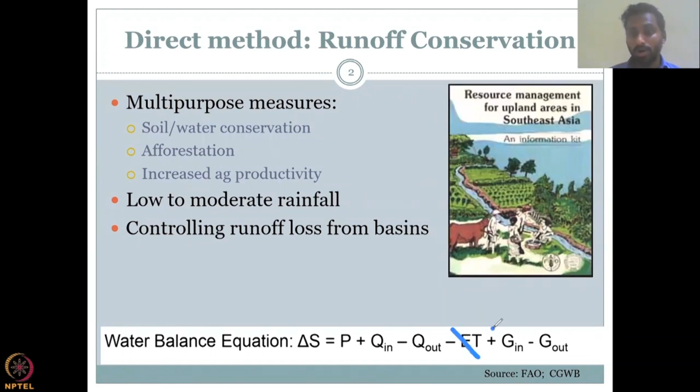And assuming, for example, in this area you don't have ET, so let ET be 0, groundwater in is equal to groundwater out, so let it be 0, and there is no water coming in. So groundwater in is 0. And surface water in, no pipe connection, nothing is coming in. This is the upland.

So what happens is your storage is nothing else but your precipitation minus the runoff, which means if you say there is 0 runoff, you close your basin, you control your basin preventing water from being lost, then your storage is basically your precipitation that you're catching and keeping within the basin. These are called zero or closed basins because they don't let the water out. And to be honest, in some regions, these are needed because the water is not enough for the upland people.

So moving on, we have these water balance equations and other equations that support that we need to capture the rainfall and also manage the rainfall very well. So these are runoff conservation. Basically, catch the rainfall before runoff, etc. If you catch rainfall directly, it is rainwater harvesting. If you let rainfall convert to runoff and then you conserve runoff, then it is runoff conservation.

So let's look at some methods. The first method is bench terracing. I'm using the methods given in the CGWB manual, and I'll be taking some references from TNAU, FAO, etc. So what you have here is bench terracing, or terracing, which is converting a sloping land into terraces. You cut through in between so that you slow down water.

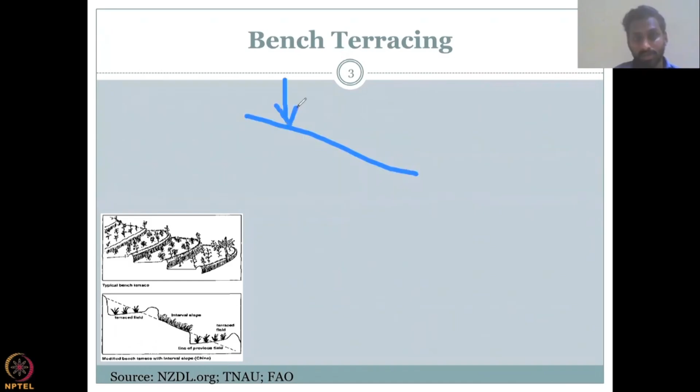So if I have it like this and rainfall is falling, water flows down along the slope. It is much faster rather than going in steps. For example, you have a slope and rainfall hits, then it quickly goes down the slope. However, if you make the surface terraced, cut through in between, then water would flow and then go down like this, go down like this, go down like this, right? I'll use a different color.

So this is your land surface. And then water will go like this, okay? So what is happening is you're delaying the water, and by delaying the water, because it goes down, goes down, goes down, then here there is good recharge happening. And net groundwater is recharged.

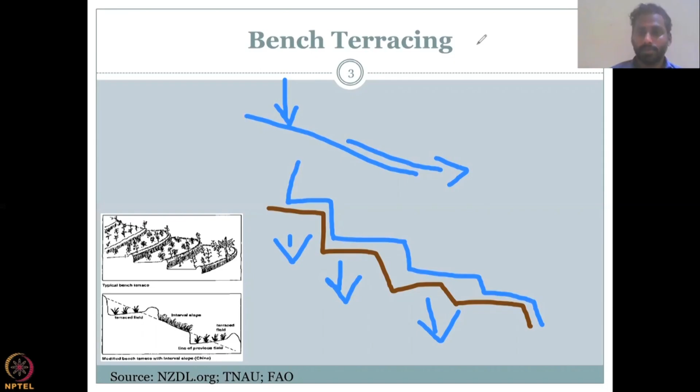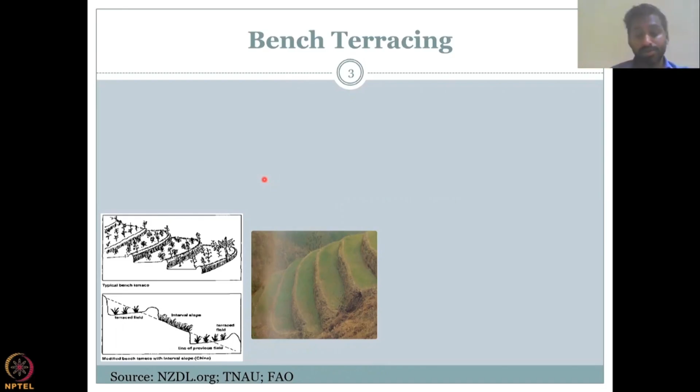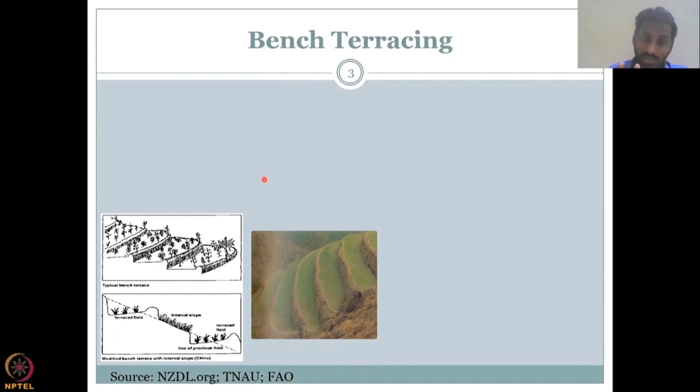Okay, so see a quick example. We have these locations mostly in the high upland regions or high elevation regions where there's good rainfall, but because of the slopy land, water just goes down. So it is kind of a runoff conservation where you wait till the rainfall converts to runoff and then you capture it, make it slowly go down and then recharge it.

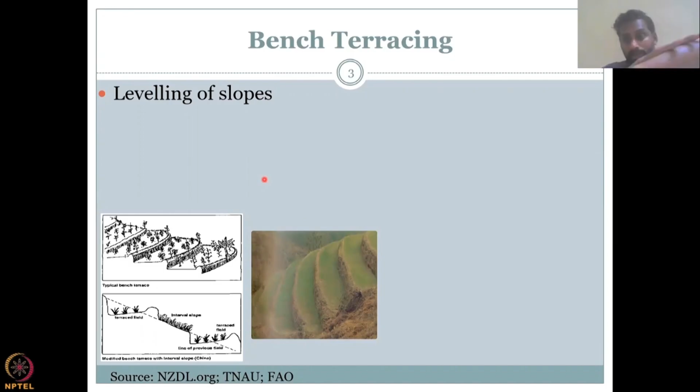So it starts with leveling of slopes. First, you make sure the slope is leveled, and then remove any unleveling patterns like a ditch or a gap, etc. So you make it leveled so that water can run smoothly, and adequate soil cover for irrigation is also needed. So you cut and then use some land where you can put the soil. So you need to get soil so that you can grow native species of vegetation or agriculture.

Remember, in the example I showed, when you cut it, you can further reduce the speed of the runoff if you have vegetation, because vegetation can act like a buffer, and that buffer would make the water go slow. Okay, so here's what is happening. If you have just plain land, then cut the land, water will move down a little bit slower. But if you have your agricultural slope along with terrace farming and or native species, water will slow down. Once it slows down, it goes into the recharge.

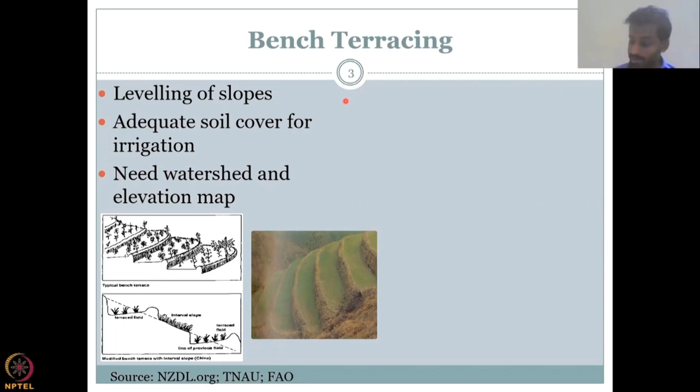You need the watershed area, the boundary of the watershed, and an elevation map. The watershed area gives you how much rainfall is going to come, and the elevation gradient gives you how many contours you can space. Okay, so because I know how the elevation changes, I can say every 10-meter elevation difference I can put one. If I don't know that, then what would happen is you will randomly put in these terraces and it won't work well.

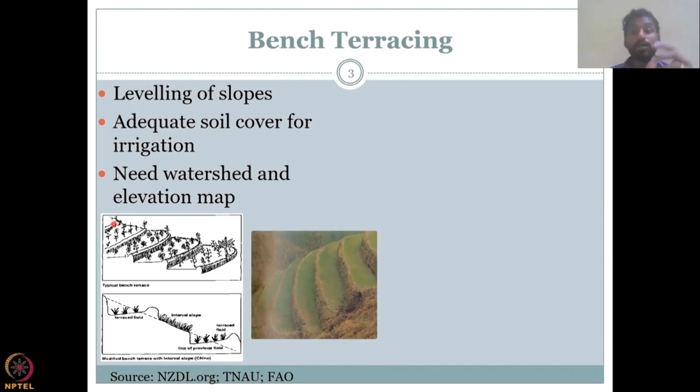So the idea is you convert a slope by cutting through terracing activities, and then put soil there, because initially there won't be any soil. Bring agricultural soil up and then put it there so that crops or new vegetation can grow. Once vegetation starts to grow, water will automatically slow down and then recharge, and also support the vegetation that is on the land. So FAO has given you multiple examples of these types, and which land uses you could use.

For example, all these are cross-sectional views. So you have the land like this, you cut the land, and then you can see from the cross-section what is the relevant construction. So if you look here, the dashed line is the initial line. It is a slope. And then you cut it, take the soil, put it down in the next terrace, or you can remove it and put agriculturally active soil, and then you can make some field, agricultural field or trees, something that can help slow down the water.

So for rice or for flood irrigation, you can keep it gently sloping, not highly sloping along the slope, because you do need water to stay there for long. Rice takes a lot of water. For mainly rain-fed crops or irrigated crops in the dry season, it's okay to have a steeper slope. Remember, to convert a slope to straight land, you have to do a lot of work, and a lot of machinery or construction is needed, like removing the soil, cutting, terracing. So understand if you have that bandwidth.

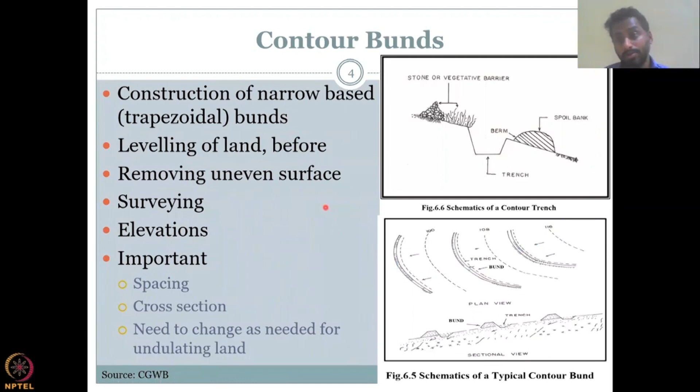Okay. So water is flowing like this. And this is where we capture it in the cross-sectional view. It goes in and then the bund. And then goes in and over. While it goes into the trench, it is recharging. Hope this is clear. More schematics are given in the CGWB document, which I shared earlier in the last class.

Then we move on to gully plugs, nala bunds, and check dams. The spelling of nala is different in different regions, NALAH, but the meaning is the same. Okay, so there are certain similarities between a gully plug, nala bund, and check dams, but there are also some subtle differences. I will go through this in detail.

And more importantly, these all work on the principle that if the runoff is reduced, slowed down, or conserved, then water will go into the recharge. Let's look at the definitions. Constructed to check the flow of surface runoff. As the word check dam says, it is made to check or slow down the flow of surface runoff. Okay, while you check, there's a checkpoint, there is traffic moving, and when there's a checkpoint, people move slow, right?

So that is where you temporarily slow down the runoff, and the runoff goes in as recharge. So here you could see water can come, and then the gully is plugged. Okay, what is a gully? A gully is a sudden dip in the elevation where water is flowing. It could be a stream order, very small stream order, etc.

So along the stream order, if you put stones and other things that is plugging, like a plug you put for leaking water, like a tap. So here, if you put a gully plug, then water will go through and recharge, and then still go through the horizontal way. Our aim is to get water vertical from horizontal. So for example, here water will be flowing and then hit this rock, still it will flow, but some water has gone into the groundwater recharge because you're slowing down the water.

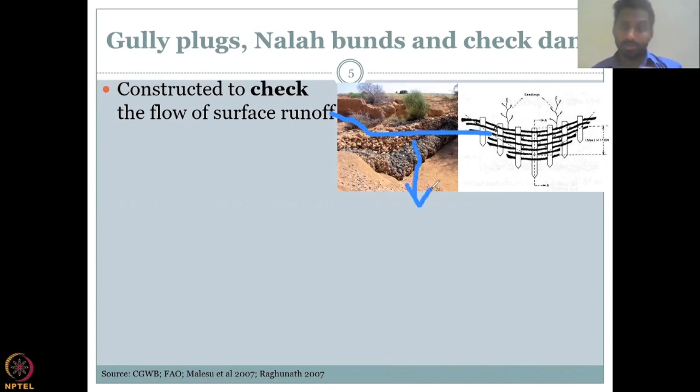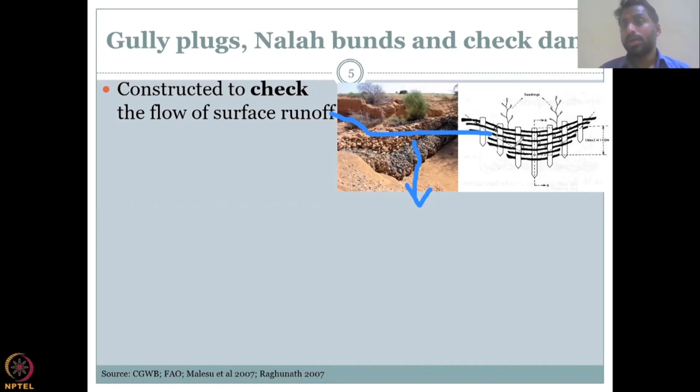And what you put in the gully depends on what materials you have. It can be rocks, pebbles, and other soil materials, or it can also be some seedlings and saplings, wood, etc. So that is the beauty of this technique. It is not that expensive. This community participation can help in building these structures, mainly to slow down the water and get the runoff in.

Construction can be of different civil work and levels. Okay, civil means civil engineering or masonry, where you can have multiple constructions or less construction. Very important to understand the bank of these gullies or stream orders. If the stream or the gully is not stable, then when you slow down the water, what happens is all these material can collapse. Some collapse is happening here, but mostly this is where the maintenance is very much needed.

Different materials can be used, ranging from wood, loose or dry stone, big rocks, or very loose stone that can be clubbed together and used. You can use wire, woven wire, like nets can be used to slow down the water, and a combination of rock and wire can be seen here in this diagram. So all these can be lined across the gully, so that water can move and then slowly get infiltrated. As I said, you can also put saplings and seeds as the FAO has recommended on the top figure.

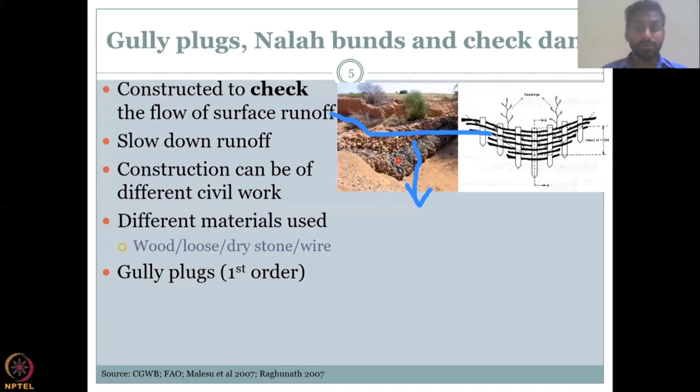So what is the big difference between the other methods? So gully plugs are the first order stream, which means it's a very small river or a stream network that connects to a river. And so the water volume and the discharge velocity is small. So even though it is low, you're trying to reduce it so that you can have more recharge. Nalas would be of a higher order. It's the same technique, but higher order. So once the order is higher, you would expect to not use the same wood or dry stone, but you would use more like cement and rocks.

In other words, if you look at where these are more appropriate, the gully plugs are more appropriate in the forested zones where you have water coming slowly. Okay, rainfall happens and the stream is just starting. The starting of a stream is along the forest. So there, the first order stream, you can put a gully plug, and right there, water can be used. In fact, beavers, it's an animal called beaver. You can Google out beaver.

So these beavers actually stop these small forest rivers by making these dams, gully plugs, and in that they can catch fish, or also they get more water so that they can enjoy the environment. So check dams are of higher stream orders, and it has a gentler slope. If it's too much slope, the water cannot stay, so it is gentler slope. Let's look at some examples.

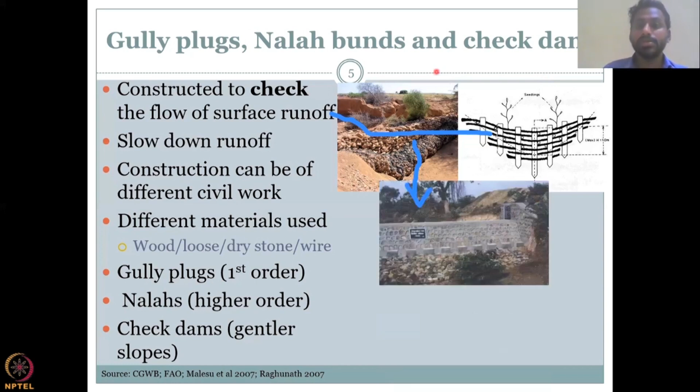So it depends on not only the water which is coming, but also how much money is available for these kind of activities. And if your village or panchayat has enough money, then mostly they go for check dams. Lesser money, they would choose the gully plugs or nalas as and when needed. And also these check dams can be in a cascading effect. So these are called cascading check dams, which means one after the other after the other.

Same way you did look at the terrace farming, where you had a terrace, another terrace, and another terrace. So, or a trench, contour trench, a trench, and then another trench along the elevations. Here, what happens is you have small check dams where water is stored and then overflows, and then stored and then overflows. So wherever it is stored, that is where the recharge is happening.

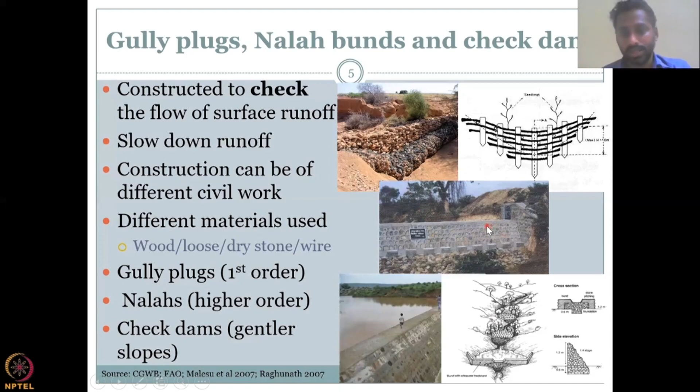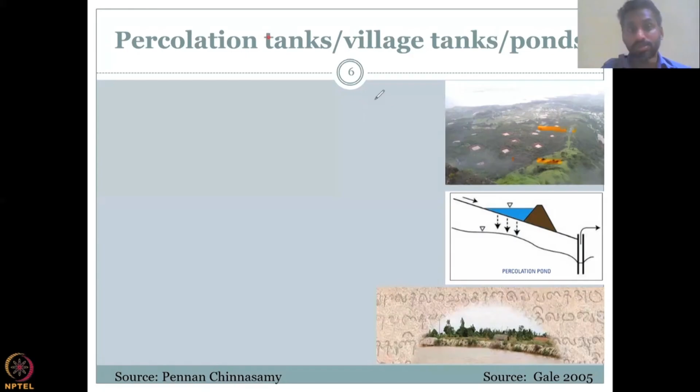Okay, it's basically excavated land along the slope or along the land surface where water runoff can be captured. But make sure the runoff comes there, otherwise there's nothing to store. So percolation tanks, how they work is a small check along the river, and it has good gravel and material underneath the dam to enhance percolation. Okay, this is the difference between a check dam and a percolation pond.

Whereas a check dam would allow the water to go and then it overflows and then goes. Here, you're trying to create a pond. You don't see a pond overflowing, not often. So you take water from the main channel and then you put it in the pond. Okay, so similar to a nalah, but bigger catchment areas. It has much bigger catchment areas, no outlets, gates, but a spillway.

As I said, you don't have a gate to open and release the pond water, but spillways are there, a small embankment, and along the embankment, the water can go. It should have high permeability. The soil or the land underneath the pond has to have high permeability. So it is not just excavating the soil and then you put the water in.

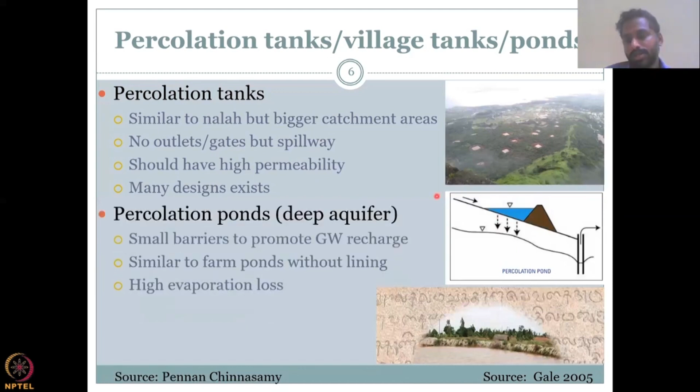Here, what mostly is done is you can line certain types of soil, rocks and materials which have high permeability, so that when you put the water in, it starts to increase the infiltration. Okay, many designs exist. We will see some of them. So in this percolation pond, what you can see is it is along the slope, and water is being first shunted into the pond area. Once the water is ponded up, then water starts slowly to recharge.

A percolation tank is along the river, and a tank can also be off the river. You can just take the water and put it in the tank. So what is the difference between a tank and a pond is, tanks can also be along the river channel, whereas ponds are normally kept away. Okay, and they need not be just fed by the river, but can also be fed by rainfall. Small barriers to promote groundwater recharge, similar to farm ponds without lining.

So normally, farm ponds have lining, which means cement lining underneath. So when water flows, it cannot go to groundwater, where village tanks and farm ponds do not want recharge. All they want is to store the water, and then they use the water later for irrigation. Whereas with a percolation pond, the aim is to get water into the groundwater. Okay, there is evaporation loss because when you pond the water, there is evaporation loss, but you are also augmenting the percolation, not infiltration, percolation.

Infiltration is just going in very slowly. This we saw in the previous lectures, whereas percolation is going into the deep aquifer. Village tanks are somewhat outside of the main river channels. It's a tank. So normally tanks are also away from the river channel, wherein water can be put in from the main channel, or runoff can be routed into the tanks.

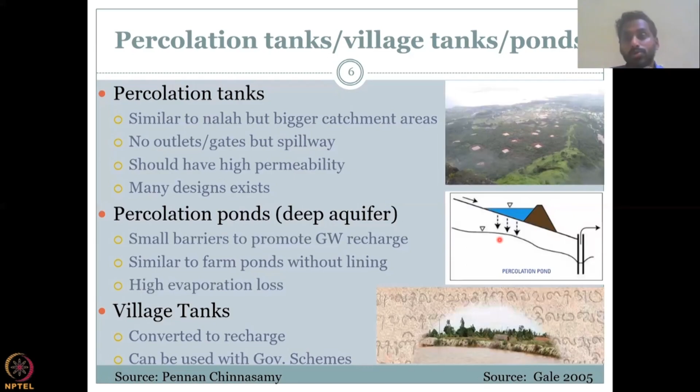Some people put plastic sheets underneath to prevent the recharge. But the idea here is, if you manage the runoff to capture all the runoff effectively and put it in the village tank, you could still get recharge going down and also use the water for domestic on the surface.

The next one I would like to touch upon is modification. So a modification of stream channel and augmentation is also very necessary for successfully reducing the runoff, conserving the runoff for recharge. So what does it mean?

So here what you see from the EPA book is that when a river is flowing, when a stream is flowing, when a water runoff is flowing, if it is made to flow in a very concentrated way, then fast it will go and less recharge is happening. If it goes in a tortuous way, there is some water that can be recharged. However, still the water can go fast.

But if you make the stream go in a wide channel, rather than a small channel, then water will be spread across and then recharge can happen. Just look at this image. So here what is happening is the river is flowing in a very small concentrated way, even though the land is available. So there is less recharge happening.

But in this system, all the other banks are protected and dug deep. Then the water spreads. Once you spread the water, there's more connection between water and land area, the surface area, and then recharge happens. So like this. Initially, this was all full water flowing, but slowly what happens is at this part it gets deeper. When it gets deeper, then the other land is not having water for recharge, only water recharge happens here.

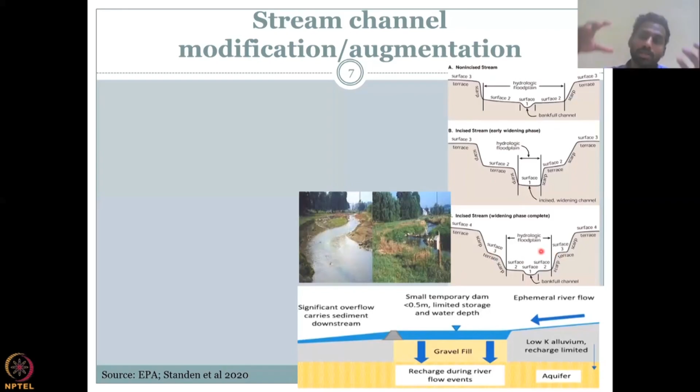So the idea is to modify or manage the stream channel to increase the connectivity of water and land to recharge. Area where flows occurs only in limited part of the valley. For example, valley is along the slopes also. It happens only in a limited section.

If you see a valley, even the Ganges valleys and basin, the bank is so big. However, water flows in a very small area. And only in that area, water is recharging. However, if you make the water flow in a spread fashion, then more recharge will happen.

Aim is to increase spread area to have more infiltration. So you spread out the water to have more infiltration. It is similar to your flood irrigation method. Here you're doing it inside a river channel.

Bank stabilization is important. So as and when this happens, you need to make sure that you clear the sediments. So what is happening here is when water is flowing, here sediments are depositing and only water is flowing in this area. Slowly the sediment deposit is high and water only flows in the central region. The idea is to make sure you push all the sediment out so that water can still flow. Then that is called bank stabilization.

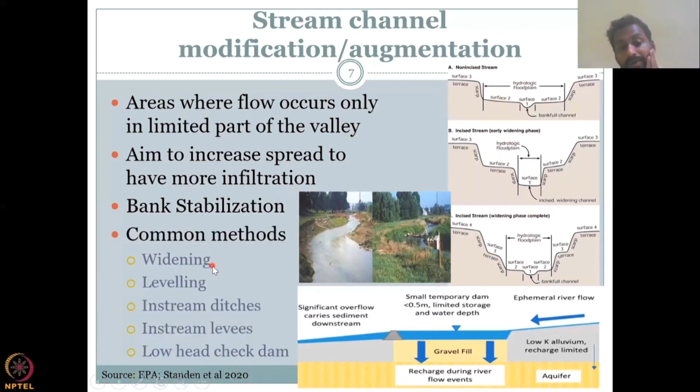The common methods are widening. You widen the area of where the water can flow or widen the stream channel. Leveling, you keep it on the same level. Like here, all the water is on the same level. In-stream ditches. So along the stream, you can have multiple ditches where sediments can be deposited rather than at one location depositing.

In-stream levees, like this example, a levee is a small check dam kind of thing, but not like a dam. It's just a small, like a speed breaker within the river. So when the water is flowing, it slowly goes above and then goes down. And while it goes up and down, there is some gravel fill here. A different material is filled so that water can recharge.

Low head check dams is the same as I said, it's in-stream levees. So you can have a small check dam, but not like a check dam where it's big and then it stops the water. It is just there so that water can go over and then slow down while it goes over.

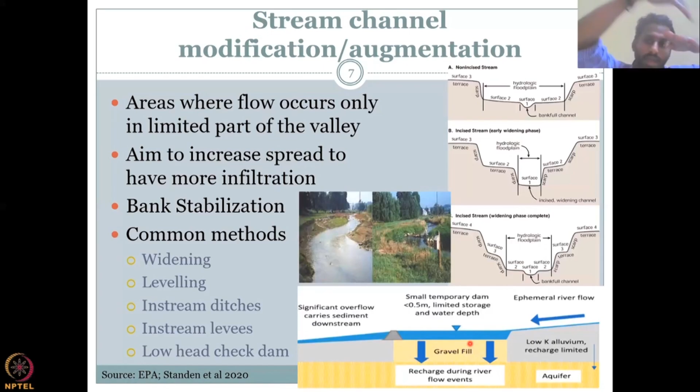So with this, I think we have covered the major factors for conserving runoff and recharging it through direct methods. I will see you on the indirect methods and other methods for groundwater recharge in the next class.